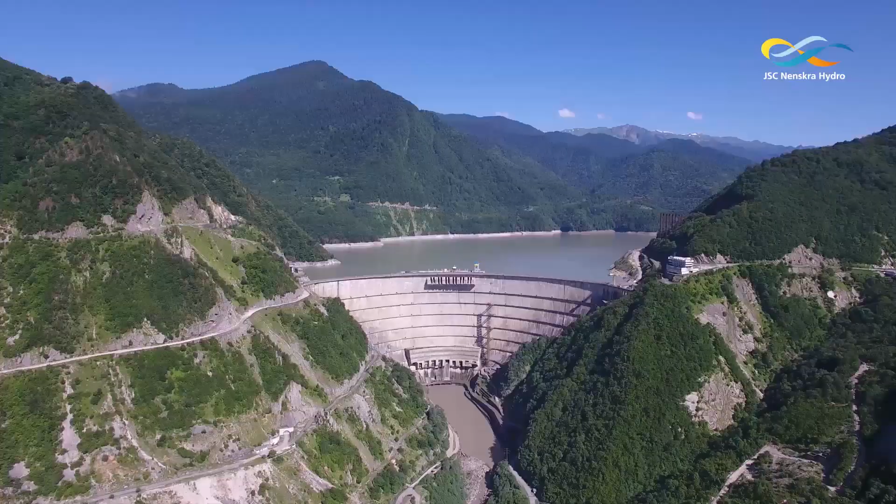Georgia has abundant water resources, with aggregated 60,000 kilometers length of 26,060 rivers, 860 lakes, and 44 reservoirs. 30,615 million cubic meters of the natural water bodies are mainly used for irrigation and agriculture. But recently, the government of Georgia has implemented an investment strategy in renewable energy by the use of abundant water resources.

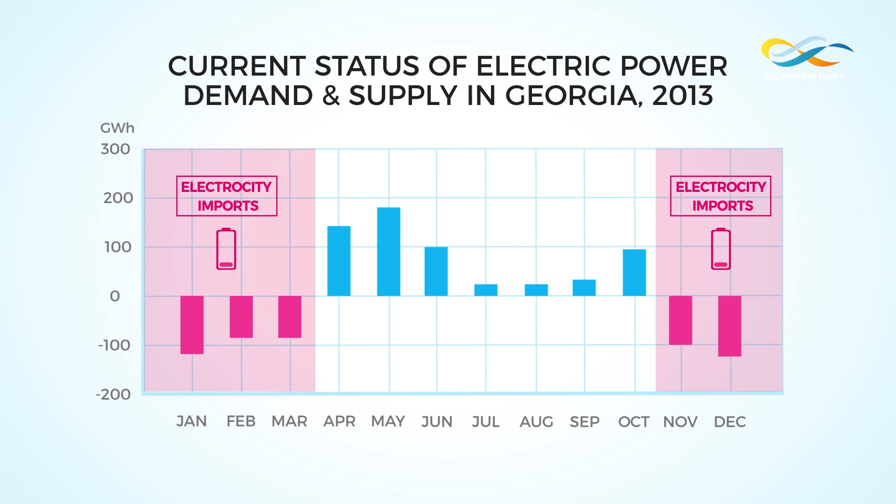In Georgian energy market, there is low demand and high supply in summer and high demand and low supply in winter. To meet the shortage of energy supply during the winter season, the government of Georgia relies on imported energy. Electricity consumption per capita in Georgia was about 2,688 kilowatts per hour in 2014, which is 36% of the OECD average of 7,407 kilowatts per hour.

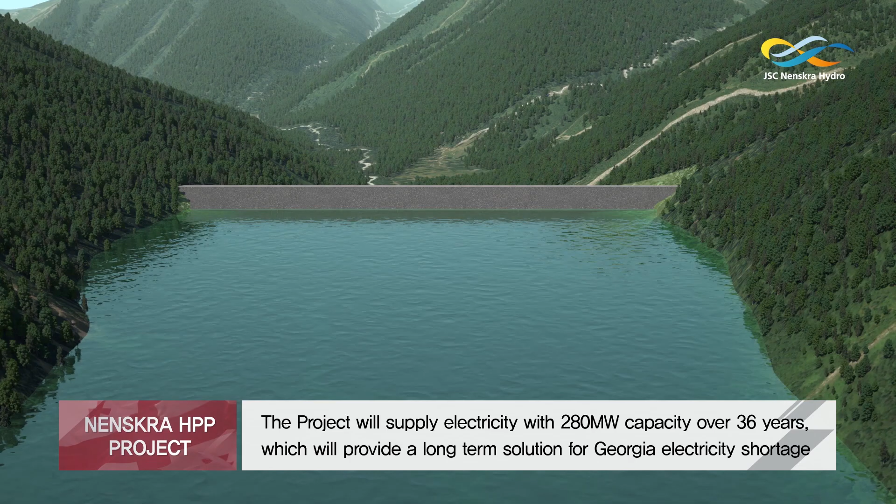According to the GDP growth in Georgia, as per capita electricity consumption continues to grow, estimated deficit by 2025 is more than 5 terawatts per hour. Nenskra Hydropower Plant project is a top priority of the government of Georgia. The project will supply electricity with 280 megawatt capacity over 36 years, which will provide a long-term solution for Georgia electricity shortage and contribute to energy independence of Georgia.

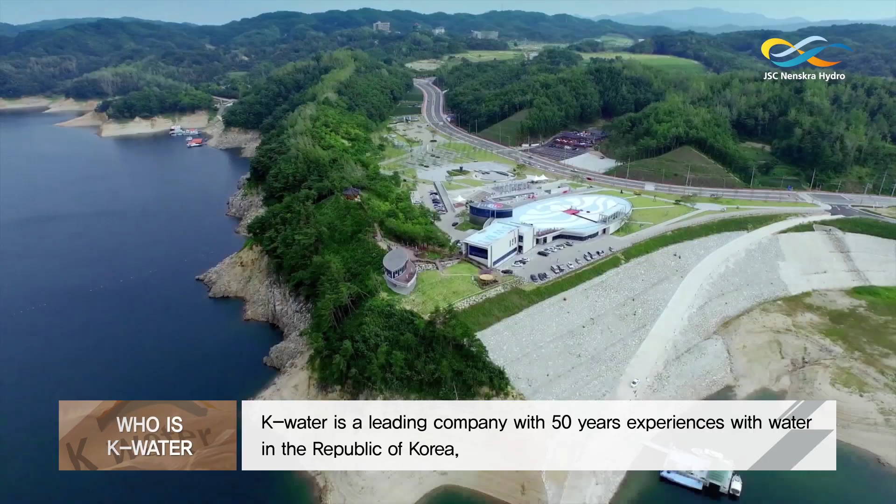Who is the sponsor? K-Water. K-Water is a leading company with 50 years experience with water in the Republic of Korea and is spearheading the future of the country. K-Water is recognized as the leading renewable energy company in Korea with advanced technologies including hydropower, tidal power, and water surface solar power.

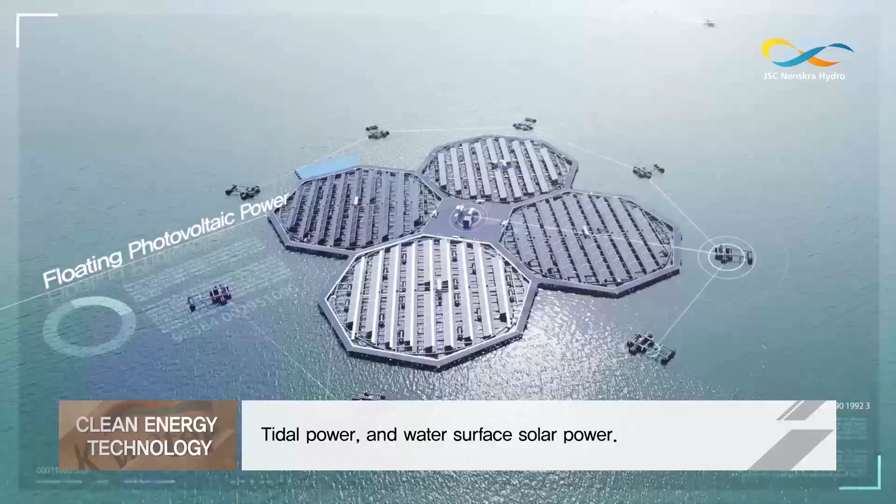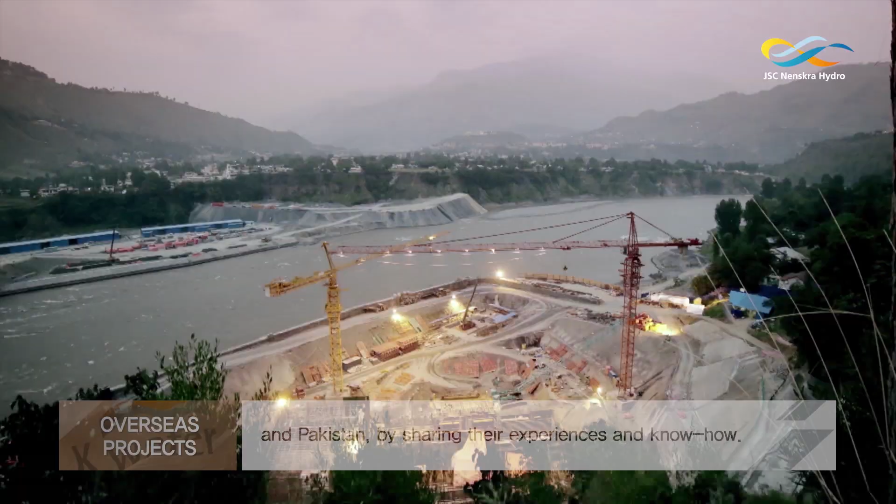Based on the developed technology, K-Water is now leading the world, including Georgia, China, and Pakistan, by sharing their experiences and know-how. In the countries where projects are carried out by K-Water, benefits of water resources are brought back to the community. With advanced technology, research and development, we are building the capacity of people to be competitive in the global market. K-Water will open the future and share happiness with water.

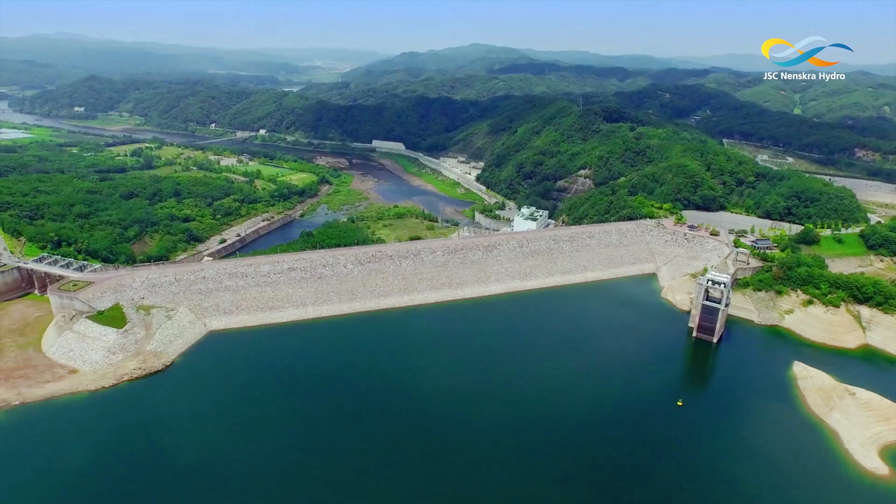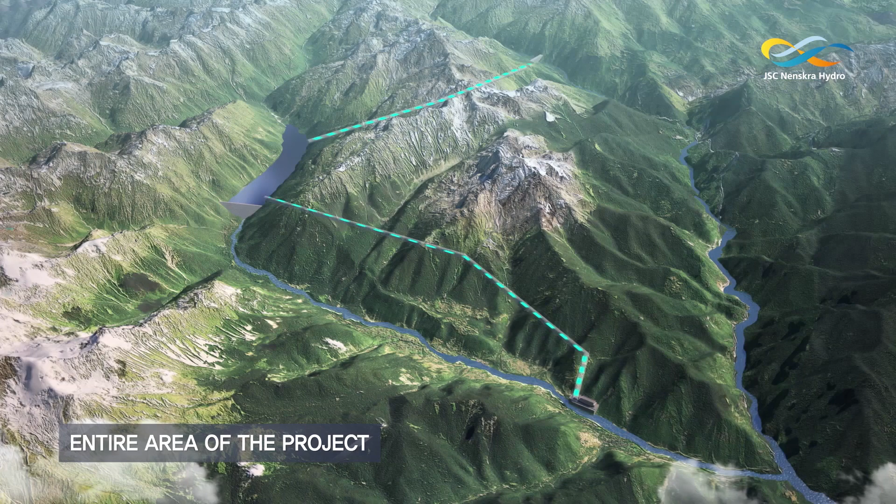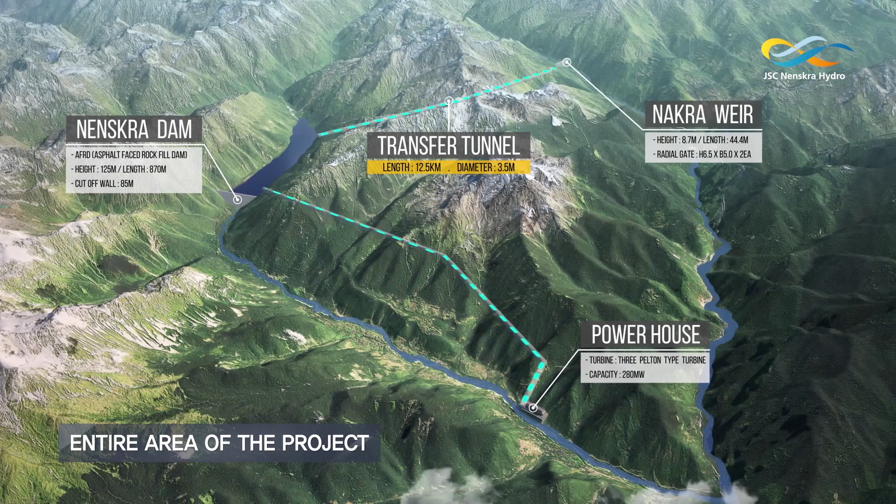Construction work process. Here we can see the overall view of Nenskra Hydropower project. The project is mostly composed of 3 structures, which are Nakra Weir, Nenskra Dam, and the powerhouse. Each structure is connected by 2 tunnels. Transfer tunnel will transport water resources from Nakra Weir Basin to Nenskra Dam Reservoir. The water from Nenskra Dam Reservoir will flow through the headrace tunnel to the powerhouse to generate energy.

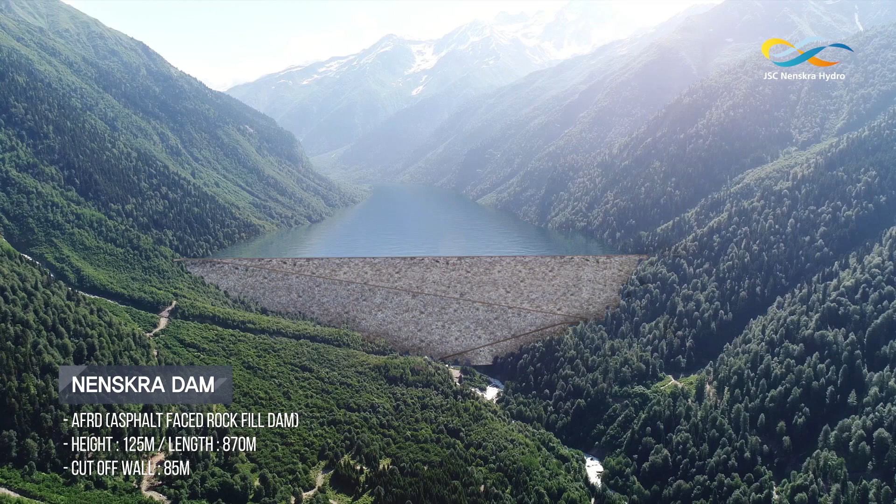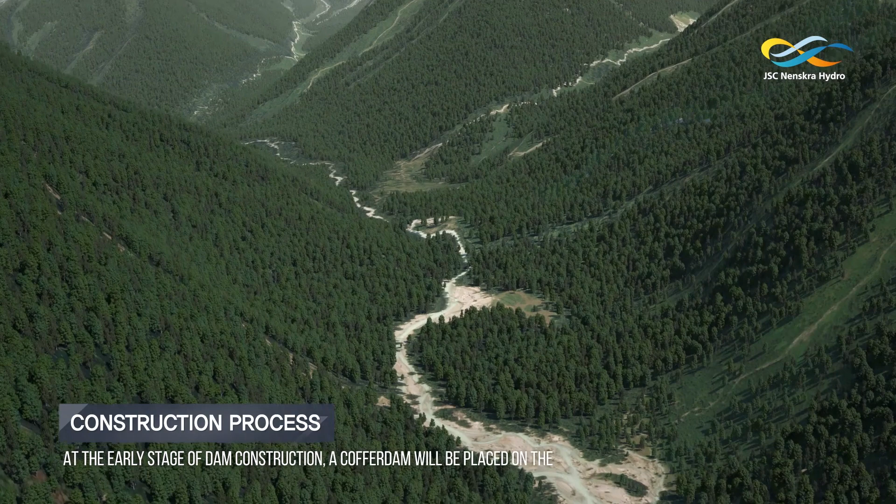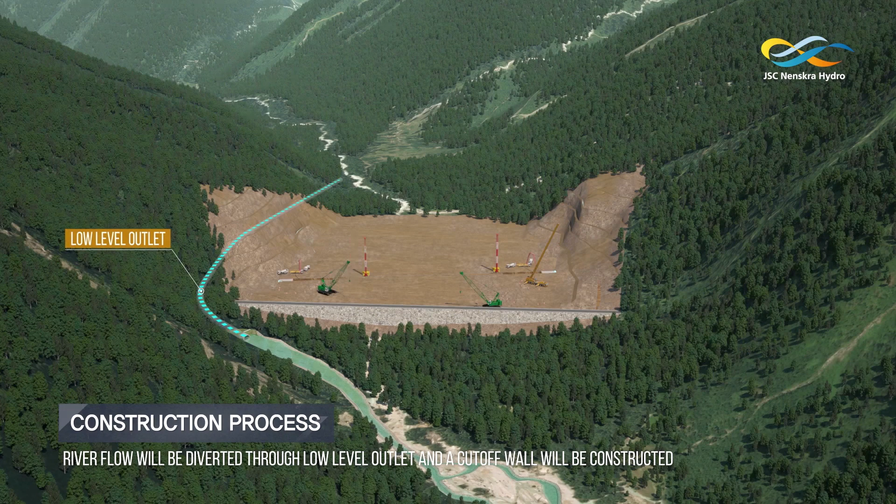Nenskra Dam is asphalt-faced rock-filled dam with a height of 125 meters and length of 870 meters. Before the construction of the dam begins, the river flow needs to be diverted to make excavation and construction activity possible at the dam location. This is done by constructing cofferdam and diverting river water through a low-level outlet. After construction of cofferdam and low-level outlet, river flow will be diverted and construction of cutoff wall will be finalized. After final completion of the construction, environmental flow will be released through low-level outlet.

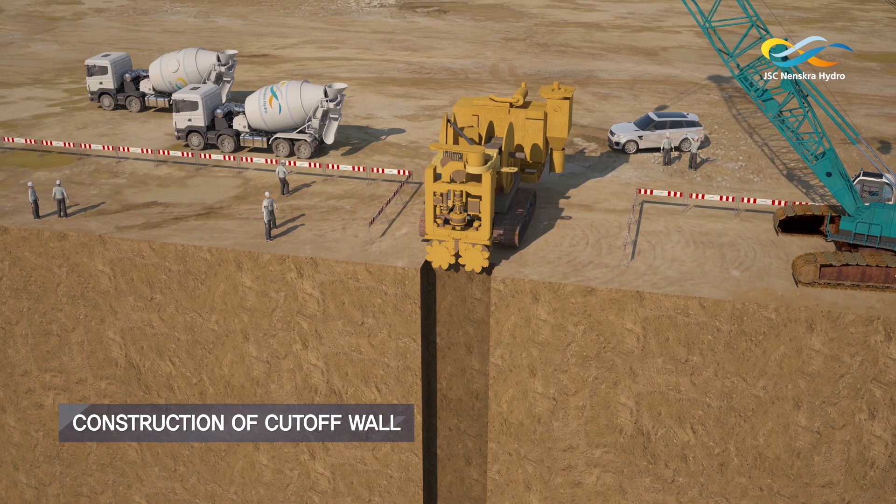Cutoff wall is a huge underground concrete wall which measures 85 meters underground. It will secure dam safety by blocking seepage through the foundation of the dam. Nenskra Dam is a rock-filled dam with a volume of 12.5 million cubic meters filled with rock. Dam slope facing upstream will be covered by asphalt, to prevent penetration of water through dam body.

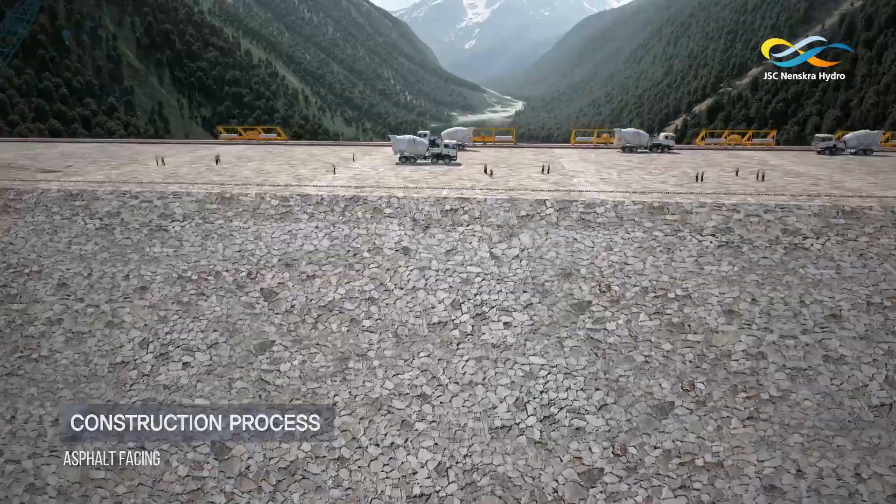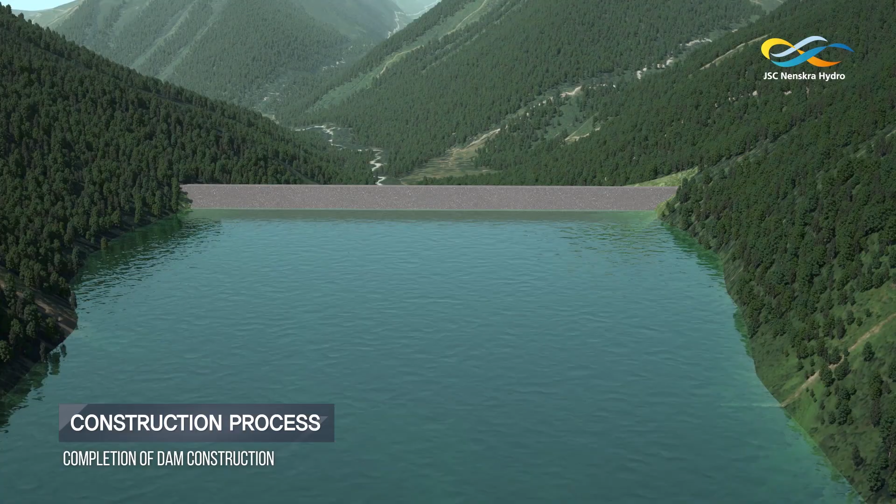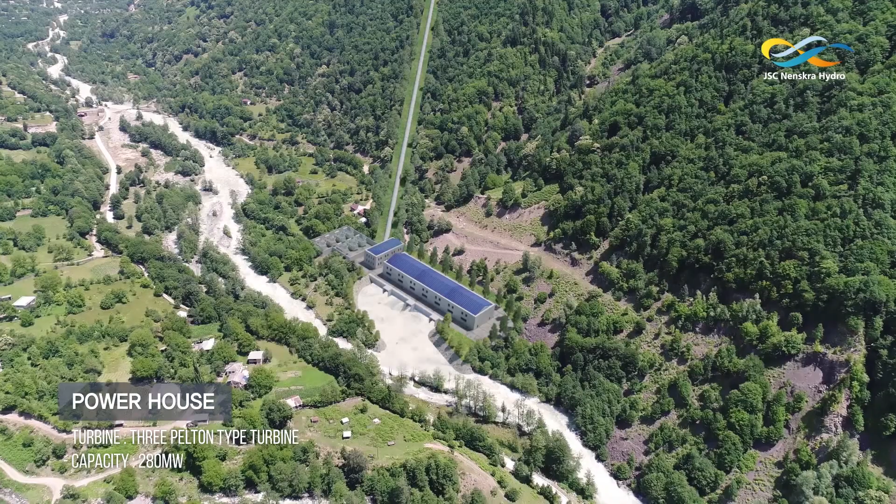After construction, 176.15 million cubic meters of water resources can be stored in the Nenskra Dam reservoir. Powerhouse is located 17 kilometers downstream of the dam with 3 Pelton-type turbines. Capacity is 280 megawatts, which will be the second biggest in Georgia after construction.

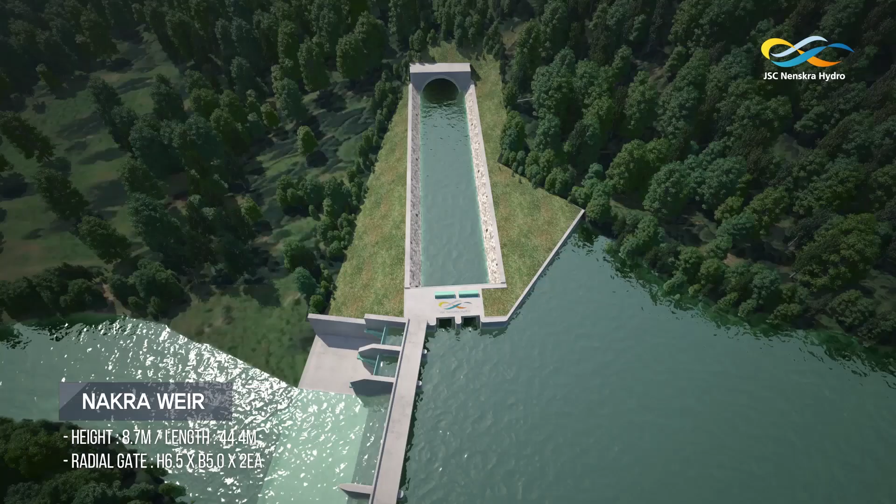The height of Nakra Weir is 8.7 meters and 44.4 meters long, which will change the water flow to transfer tunnel. During normal season, environmental flows will be diverted through fish paths that will be constructed to allow movement of aquatic wildlife. And during flood season, 2 radial gates will be operated to control flood.

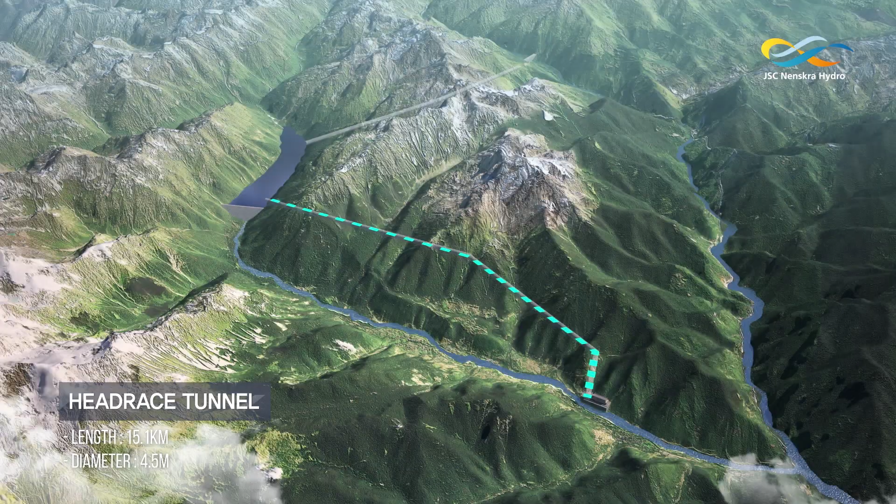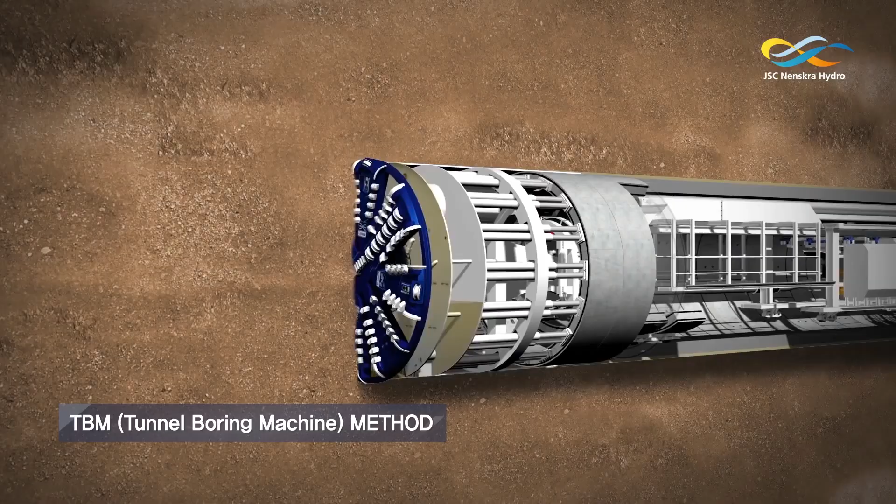15.1 kilometer long headrace tunnel with a diameter of 4.5 meters will transport water from dam reservoir to powerhouse to generate energy. The tunnel will be excavated by tunnel boring machines. By using this method, it is possible to excavate tunnel without blasting, thus minimizing vibration and noise.

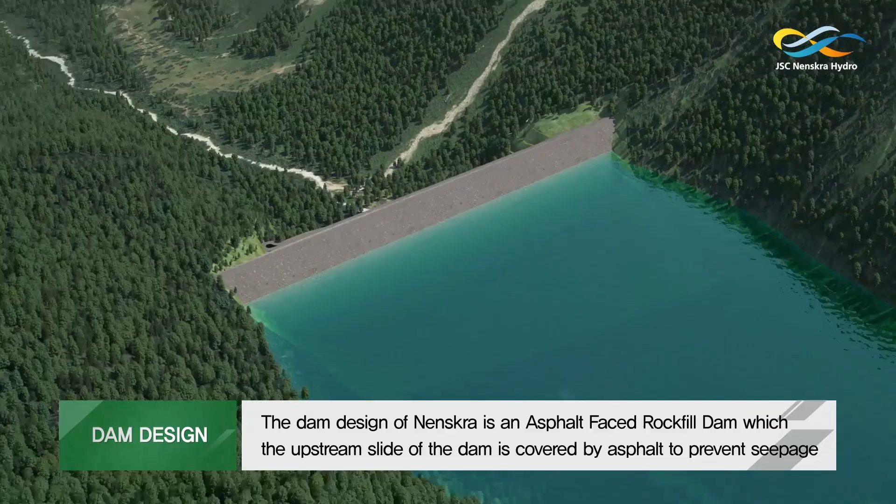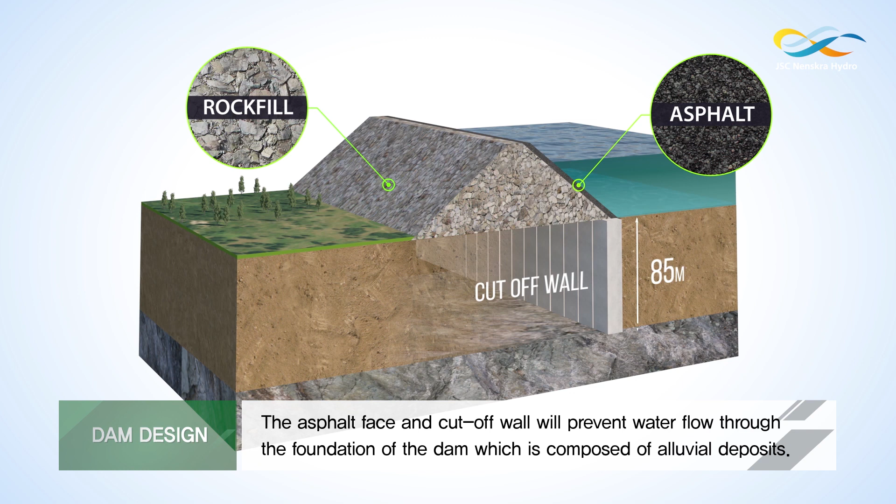Dam safety. The dam design of Nenskra is an asphalt-faced rockfill dam, in which the upstream slope of the dam is covered by asphalt to prevent seepage. The asphalt face and cutoff wall will prevent water flow through the foundation of the dam, which is composed of alluvial deposits. Cutoff wall is a concrete underground wall of a depth of 85 meters. Under the dam abutment, the foundation will be reinforced by grouting.

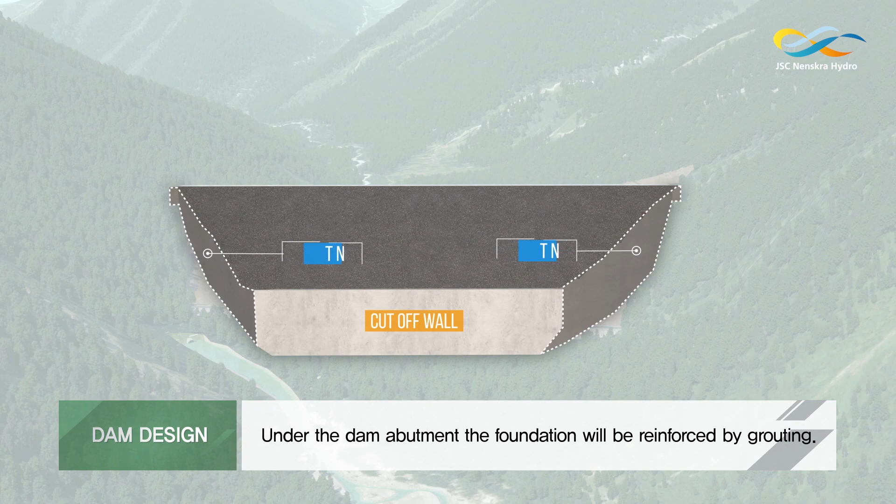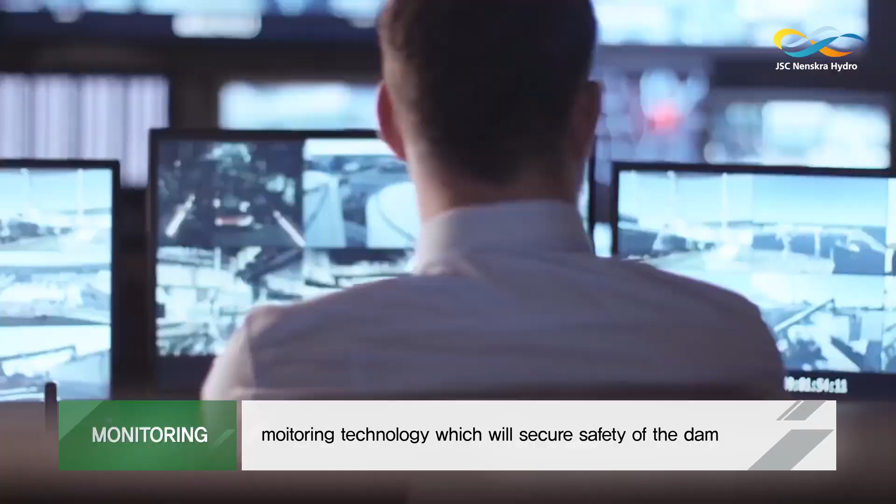Measuring devices will be installed to detect any displacement of the dam, and state-of-the-art monitoring technology will secure safety of the dam. The dam has been designed in alignment with international best practices and international standards, such as the Standard of International Commission on Large Dams.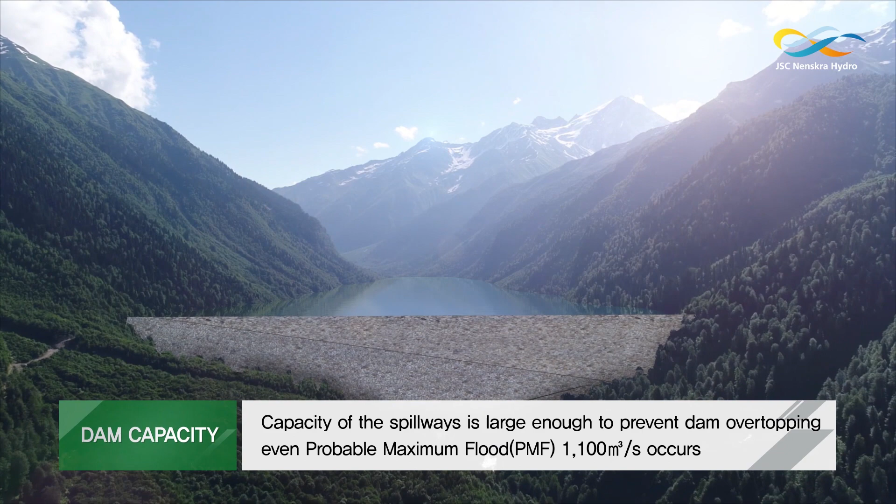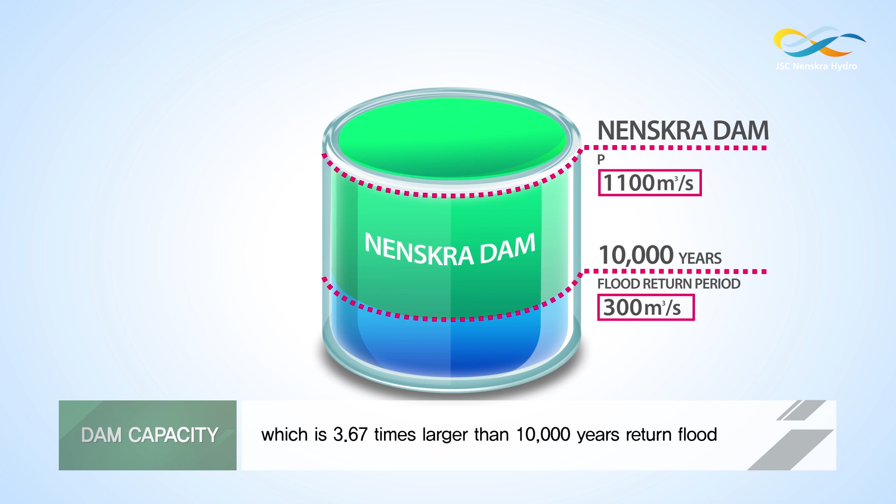Flood risks in the Nenskra Valley. Capacity of the spillways is large enough to prevent dam overtopping, even if probable maximum flood, 1,100 cubic meters per second, occurs, which is 3.67 times larger than 10,000 years return flood. Floods usually occur in autumn, and when floods occur, the reservoir will reach a maximum operating level. Flood inflow to the reservoir will be discharged from the reservoir via spillway.

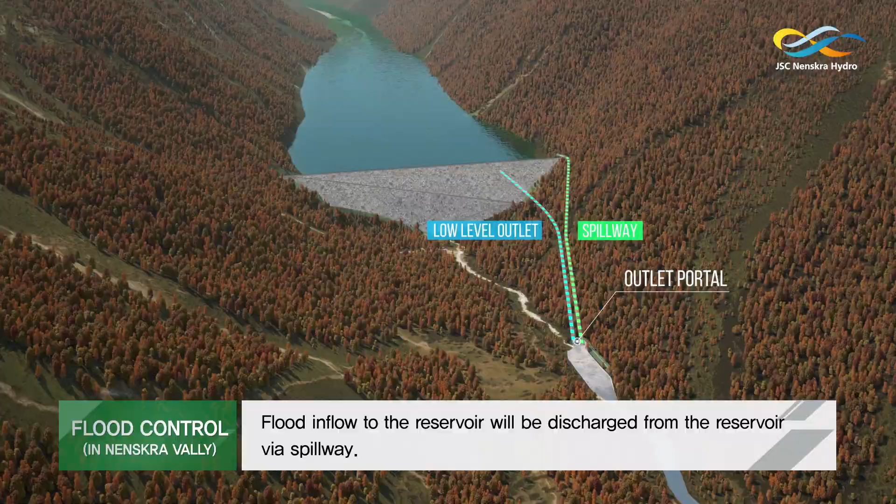During floods, the gates located in front of the transfer tunnel will be closed to block the water from Nakra River, and radial gates in Nakra Weir will be opened to control the flood flows.

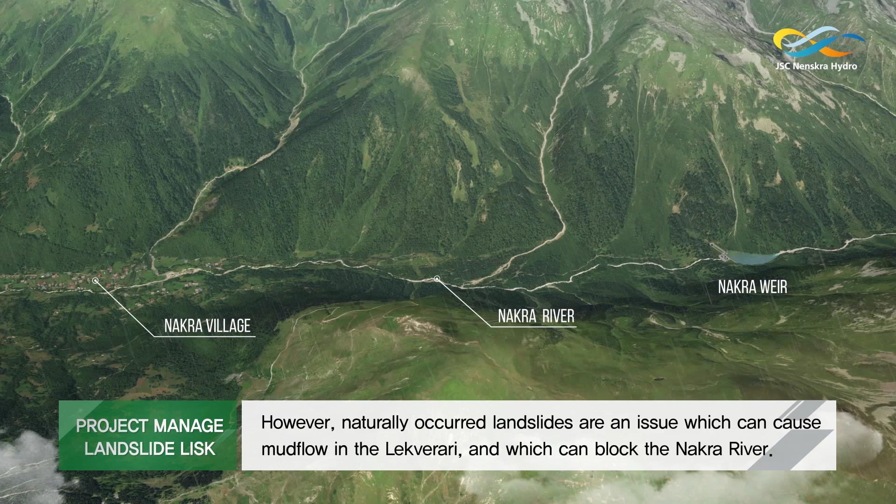Landslide risks management in the Lekverari Valley. Landslides in the Lekverari Valley are natural events which are usually triggered by heavy rainfall. The project will not influence the frequency and magnitude of the landslides. However, naturally occurred landslides are an issue which can cause mud flow in the Lekverari and which can block the Nakra River. The blocking of the Nakra River can cause flood.

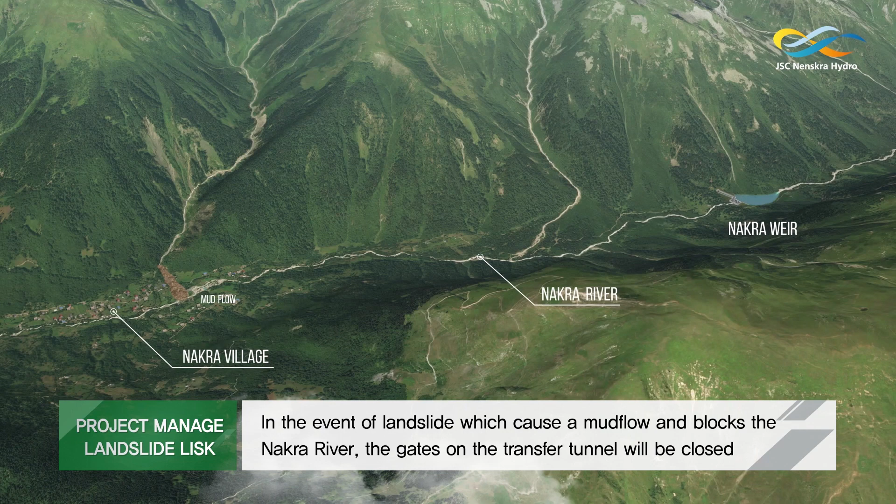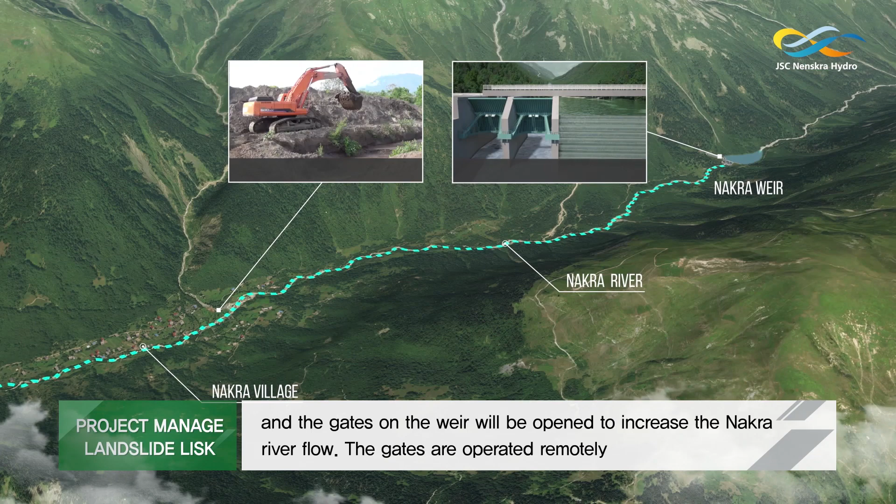In the event of landslide, which causes a mud flow and blocks the Nakra River, the gates on the transfer tunnel will be closed and the gates on the weir will be opened to increase the Nakra River flow. The gates are operated remotely. In addition, a mechanical shovel can be mobilized to remove the debris.